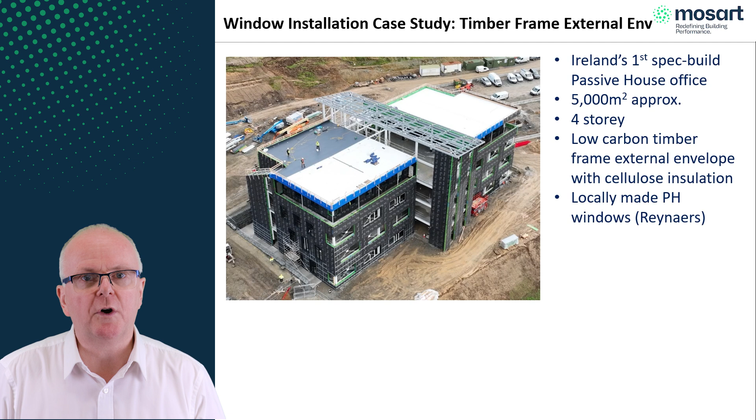And the insulation in that external wall is cellulose insulation, which is made from recycled newspapers. We're a big fan of that. And the windows were actually made locally as well by Reynaers. The windows were made about 5 kilometres away. So a really interesting case study. But just to remind ourselves now, we're here to talk about windows. So let's have a look at that.

Okay, let's look a bit closer now at the facade. So you can see here, these panels were made in a factory, and that black membrane there is what we call the weather defense layer. Sometimes it's called a breather membrane, and it's waterproof, but it's wind tight. And so it's waterproof, wind tight, but vapor open.

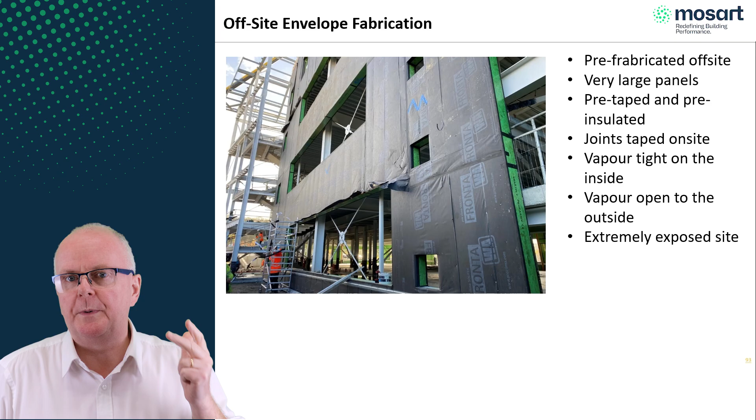How about that? So if any vapor manages to leak into the assembly in the winter time, there's a vapor drive from inside to outside. So basically the vapor is trying to escape out through the wall, and it's very important that whatever membrane you have on the outside of your timber wall is vapor open. So I'm going to say that again. It's wind tight, it's waterproof, but it's vapor open. What an amazing product. And you can see then the big holes for the windows, which we're going to look at in a second.

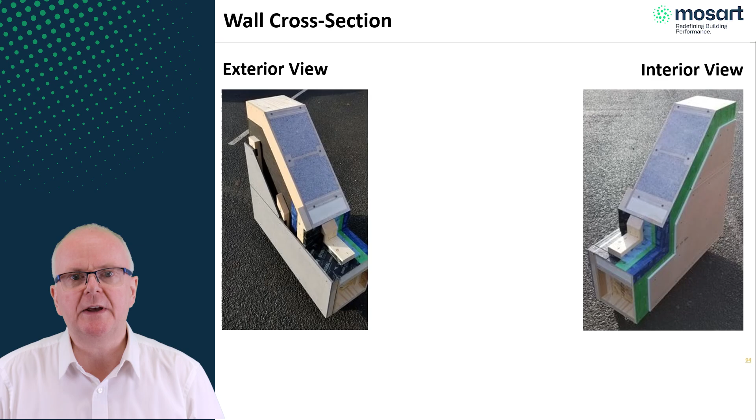You're really lucky, guys. Today we actually have a cross section of the wall, and I want to go through the various elements with you now. We've got an exterior view on the left, and an interior view on the right. So let's have a look at the different materials. As I mentioned, the wall is insulated with cellulose, and we don't have a solid stud in the wall. We actually use a TJI beam. It's kind of like a steel beam but made of wood, right?

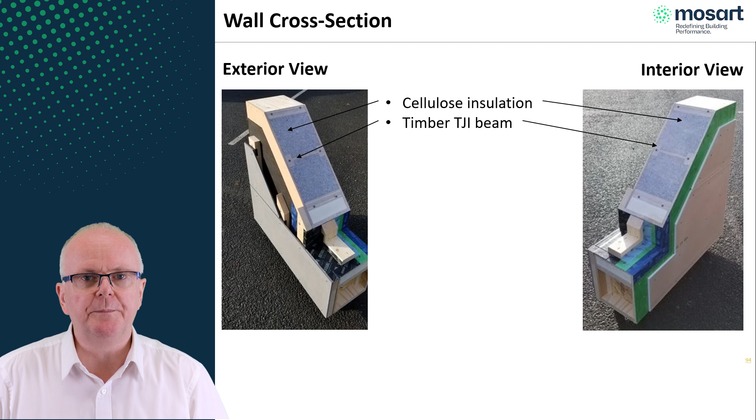And the advantage of that is it really reduces the thermal bridge effect through the wall. Because of the shape of that stud, you've actually less wood, and therefore you have more insulation. So it basically improves the U value and reduces the thermal bridging. Now on the exterior of the TJI beams, we have a racking board called Medite Vent. So it's a sheathing board, but it's completely vapor open. And on the outside of that, again, we have this vapor open weather defense layer, and you've got your rain screen on the outside. I won't dwell too much on that.

And then on the inside, this green board is the board that we're using for airtightness. You would have seen that in the airtightness and vapor control module. So on this project, we didn't use a membrane for airtightness and vapor control. We used that Smart Ply OSB board. And then finally, for fire lining and so forth, we've got a plaster board on the inside. So that gives you a fairly good cross section.

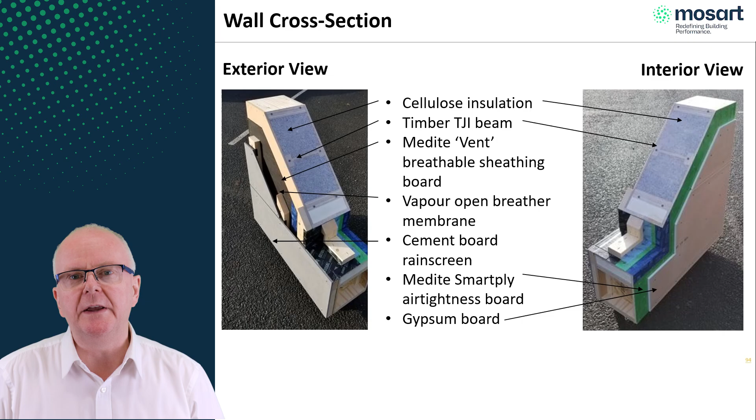And you can see the window, by the way. We're simulating a window in the middle of the wall there. So let's have a look and see how we did that in a little bit more detail. So we have a detailed construction drawing here now, a plan view.

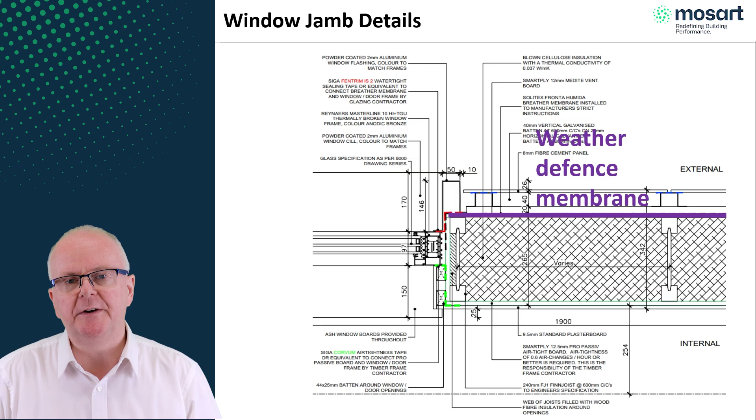You can see the window towards the left. You can see the TJI beam. We've got our weather defense layer, which is that black membrane on the outside, which is vapor open. And then we've got our cellulose insulation. And on the inside, we have the airtightness and vapor control layer, the AVCL. And in this case, it's created by that green OSB board.

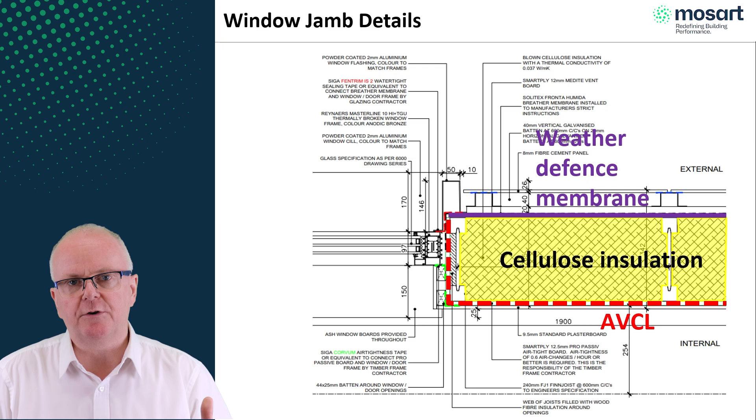If we zoom in a little bit closer, of course, everything has to be taped to the windows, and we're here really to talk about windows. So we've got just a small little detail between the TJI beam and the window reveal. There's a small little pocket there, isn't there, that has to be insulated.

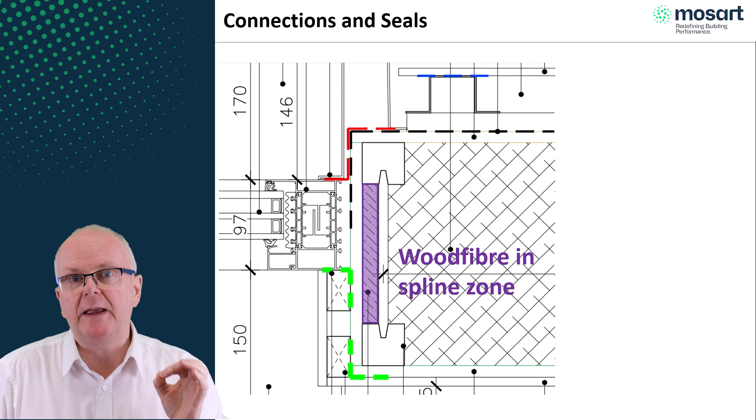And it would be very difficult, actually almost impossible, to get cellulose insulation there, because cellulose is like dust nearly, it's like feathers, and it just wouldn't remain in place. So we actually put a wedge of wood fibre insulation there, kind of semi-rigid, stays in place. And again, low embodied carbon, really, really pleased about that.

So the red tape that we're seeing on the outside, it's not actually red in reality, but we use a special tape on the outside to connect the window frame to the weather defense layer. And then represented in green here, we have another tape on the inside, which we'll show you in a second, where we tape the window frame to the internal OSB board, right? So we're basically using a tape on the outside to connect to the weather defense layer, and a tape on the inside to connect to the AVCL.

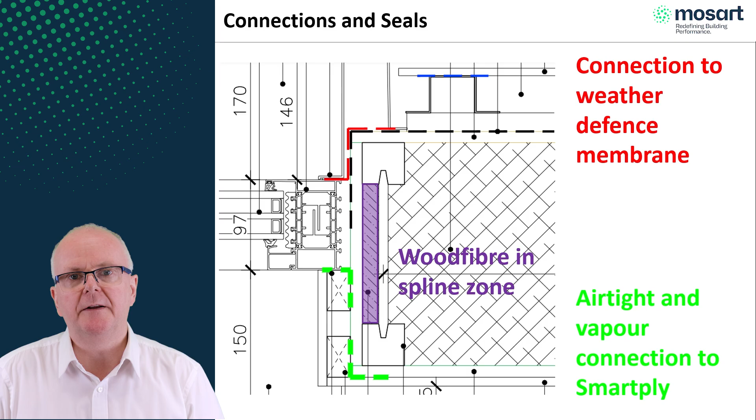We did a thermal bridge analysis on this detail, by the way, and we're quite pleased with the overall psi value. You can see the psi value there, 0.058. It could be better, to be honest. If we surrounded the whole rough opening with insulation, we could have improved that psi value a little bit. If we put insulation up against the frame, either on the outside or on the inside, we could have improved the psi value a little bit. But it's a very, very simple detail.

It's not fantastic with regards to thermal bridge coefficient, but there's no condensation risk. You can see the FRSI there. Once the FRSI is above 0.7 in our climate, there's no risk of condensation. So it's safe from a condensation point of view. It's affordable, buildable, and the psi value, the thermal bridge coefficient, is not too bad. It's not great, but it's not too bad.

And again, I'm not at all reluctant to share that with you, because no building is perfect, and if you chase perfection all the time, you'll run out of money, you'll run out of time, and the whole thing will become hugely complex.

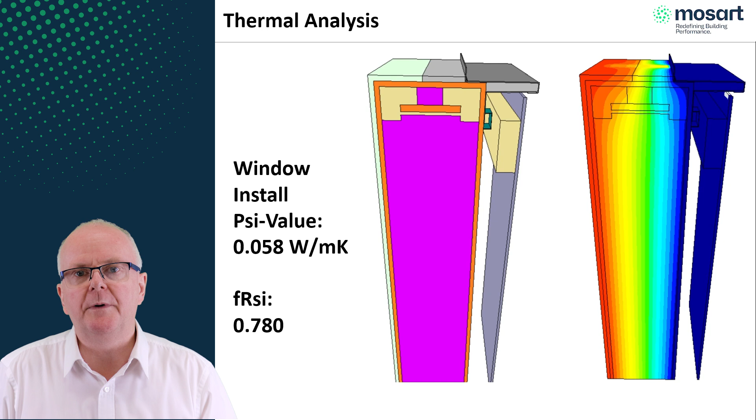So let's have a look now at the window where it has been installed in the wall. The black aluminium frame on the right hand side, that's our window, that's the Reynaers window. The green board is our airtightness board. The black tape there, by the way, is where we've actually taped up all the joints for the various boards, so I think that makes sense.

What I want you to see here basically is the white tape that we've used to tape the window to the reveal. And look especially at where there's some brackets here. You can see there's a window bracket on the vertical, on the jamb, and also on the horizontal. And we had to put an extra bit of airtightness tape in those places, just to make sure that we had the end of the bracket covered.

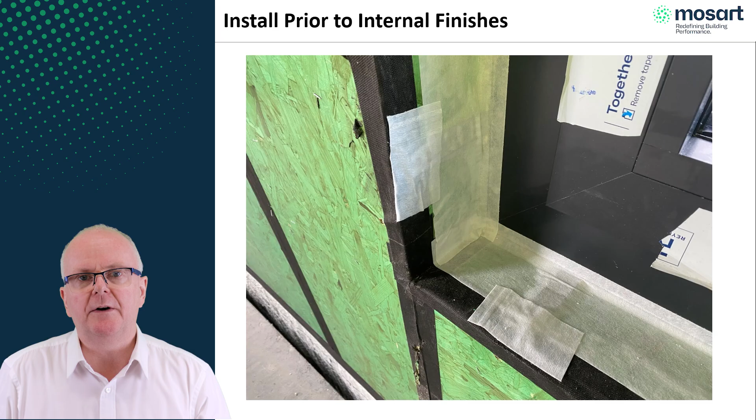Because when you run a tape along and it has to bump over a metal bracket, obviously there could be a compromise there in terms of airtightness. So we left nothing to chance there. We covered absolutely everything. What does it look like from the outside?

You can see now our weather defense layer with the black membrane. The window is now in position. You can see that hopefully. And now you're actually seeing the vertical and horizontal rails on which we put the external cement boards for the rain screen. So hopefully that gives you a good sense of how we've installed these passive house windows in this certified passive house office building.

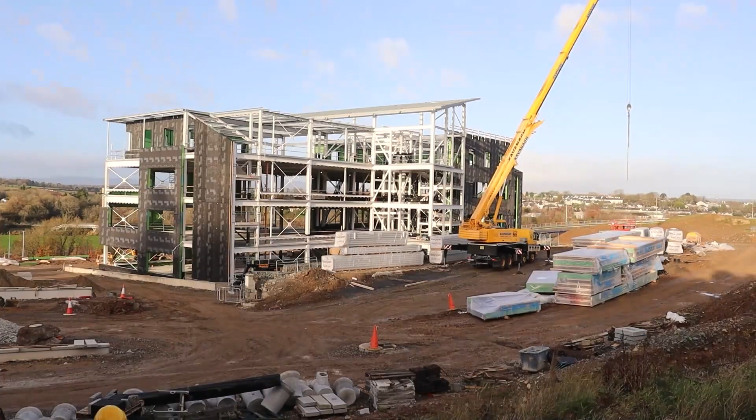On this project, there's 955 square meters of windows. And even though the windows are really good in terms of U value, they're the weakest part of the envelope. So we've got to concentrate really very clearly on window placement, connection to the airtight layer, drainage, and all of that kind of thing. So we're going to have a quick introductory look at this now.

This is our airtight insulated thermal envelope here, and we're looking at a window opening. Now, ideally, we're going to place the window somewhat in the middle of this opening. If it's very far out, you have more solar gains. If it's very far in, you have less solar gains. So we have to model all of that in the software to find the optimal position. So that's an existing opening.

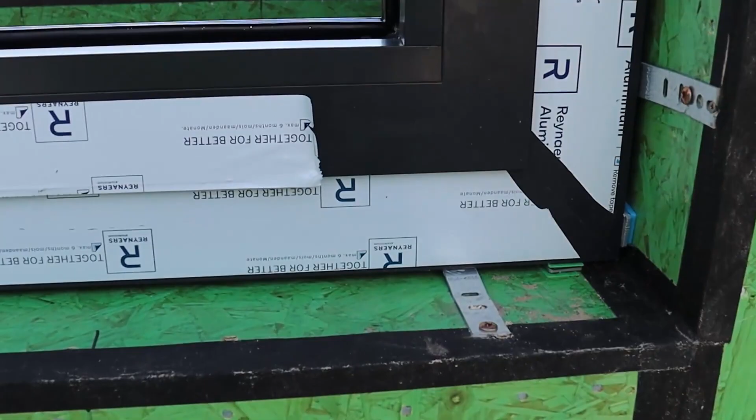If you come over here now, you'll see we've installed a window here. The glass is yet to be installed in this, obviously, but you can start to see here now the process. We've got these straps here. Triple glazed windows, very heavy, a lot of weight there, so it's got to be strapped in very, very securely. And you can see also here these shims, because we've got to make sure that the window is inserted plumb, so it's plumb this way, and everything is sort of lined up very nicely.

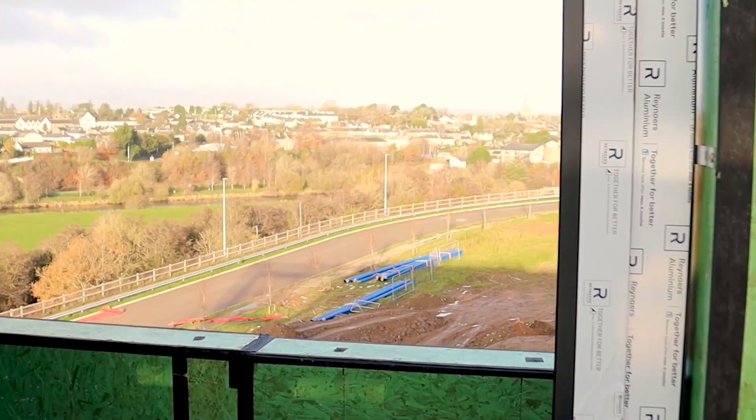There's going to be a little gap here, a little tolerance of maybe 5 or 6 millimeters here. We're going to put some insulation in there, and then we're going to make an airtight connection there as well. So we're going to show you how to do the airtight connection in a few moments. It's really windy and cold here today, and you can really appreciate the importance then of airtightness and stopping that cold air infiltration. We've got our windows here.

The glass isn't in yet, but what we're looking at here specifically is the airtight connection to the envelope. These green boards here, this is a Smartply. That's the opaque envelope, which is obviously very airtight. So we've got to make a very good connection now between window frame and our airtight wall. We're using this airtight tape here.

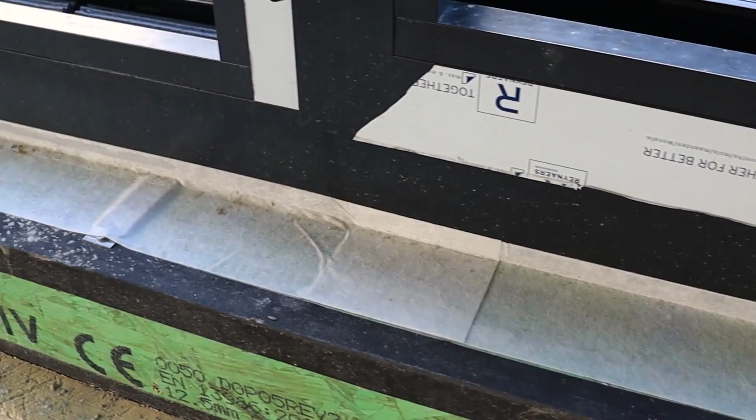We're coming up only a little bit on the window frame, maybe 10 or 12 millimeters. You don't come up too far on the window frame, because otherwise the tape might be exposed afterwards. So you definitely don't want to see the tape. One little quality assurance issue here. You can see where my finger is.

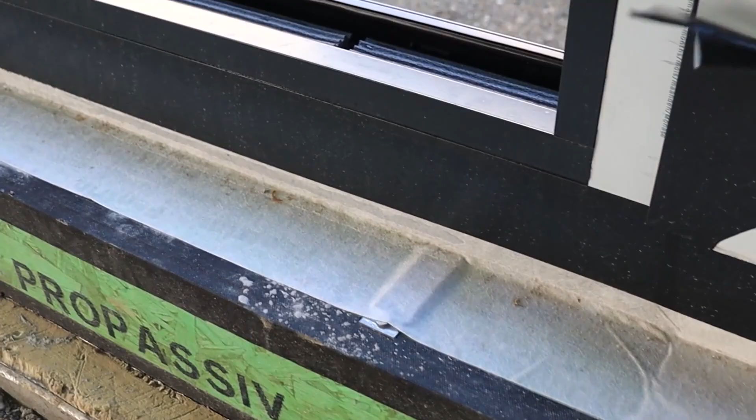There's a metal bracket here which is keeping the window in place, and we're being very fussy on airtightness there. We want to actually go back over now and put some additional tape over that bracket so that we don't have any micro little holes there for air leakage. So we're really down to that level of airtightness.

And just in the corner here, you can see it's very important that we don't have any rounding of the airtight tape at that junction. If there was a rounding of the tape there and somebody comes in to put a window board, you could shear the tape at that location and have an air leakage. So all of these things are terribly important when we're talking about passive house levels of airtightness. So it's great to see this underway now here today.

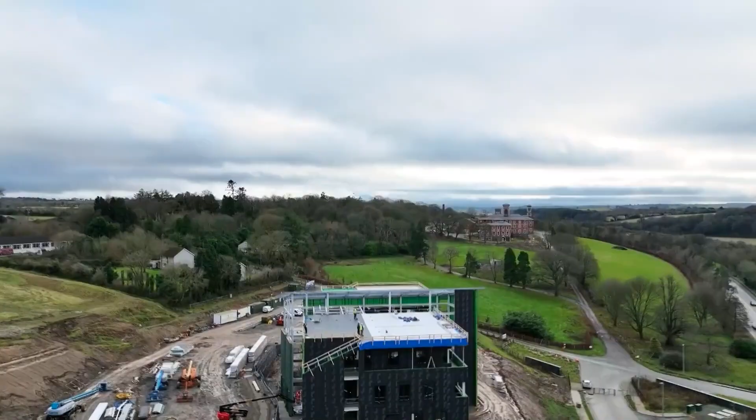The outside now clearly, and on the outside we want to think about wind tightness. Inside is for air tightness, outside is for wind tightness generally, and it's extremely windy here today. So we've got our window frames here, and we want to make a wind tight connection between the window frame and our breather membrane on the outside. This is wind tight but vapor open, more of that later. And this is a wind tight connection here.

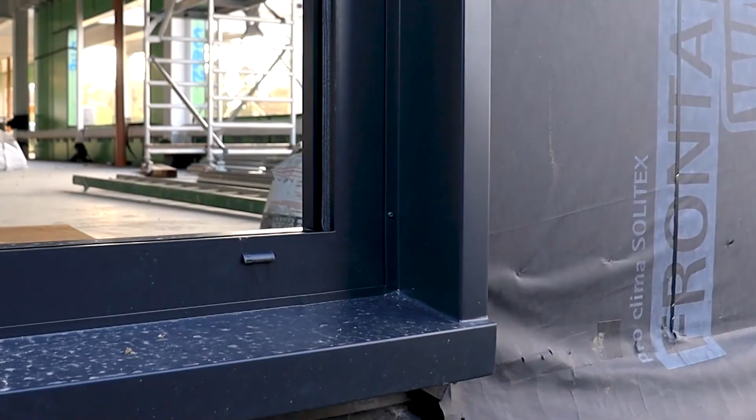Again, we don't want to come too far on the window frame here, and we've got to make sure that there's no rounding in any corners, because if there's any rounding, it's going to get shorn later on some way in the process. We're also using the same tape down here as a sort of a flashing. So we've got the weep holes here. These are the weep holes for the aluminium window system in case there's any moisture build up inside in the frame. But it's very important then that moisture is brought away if there is any risk of moisture in the window frame. So it's all connected up here and it's all beautifully well sealed up.

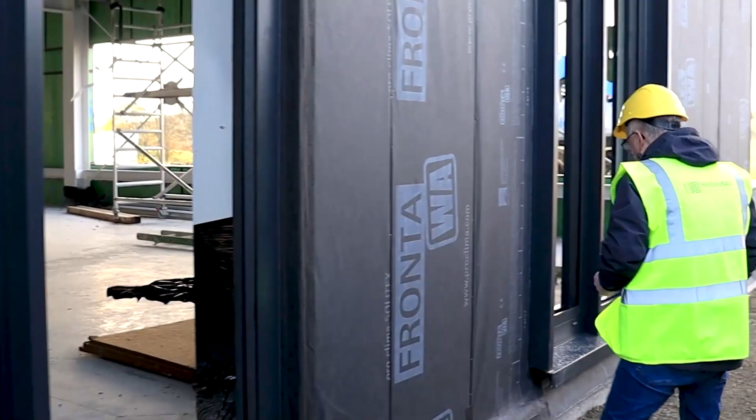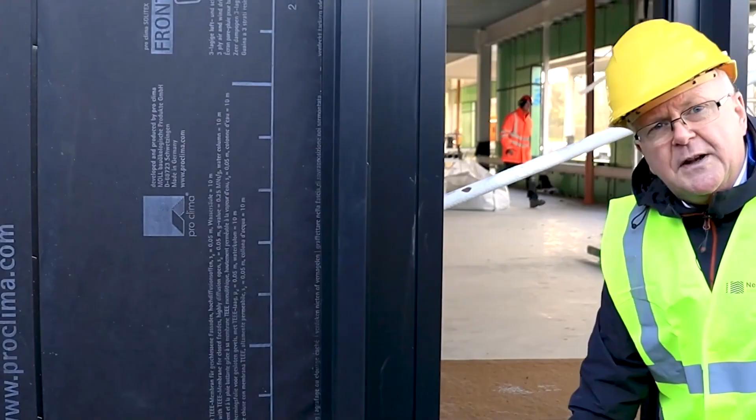And then if you come a little bit further down here, we're at another stage where we're starting to see now the flashing going in. So this is the flashing system here. So the bulk water, the rainwater will run down here, hit this pressed metal windowsill, and run off the facade of the building.

So wind tightness is really important, and we're on a very exposed site. We're in a river valley here, and we don't want to lose any heat through lack of wind tightness and lack of air tightness. So I'm really quite happy with what I'm seeing here on site today.